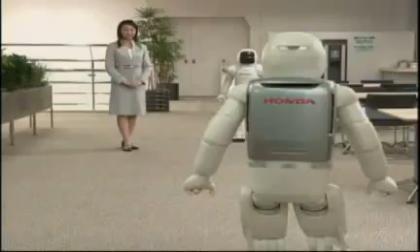This social robot watches another robot which acts as a teacher. Once it can model the teacher, it can try and figure out how it could do this action better than the way the teacher is doing it.

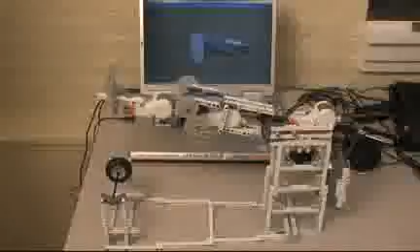But what happens when you have 3 robots or 3 people all learning from one another or working together, collaborating to try and achieve something? Then you get into what's known as the study of social networks.

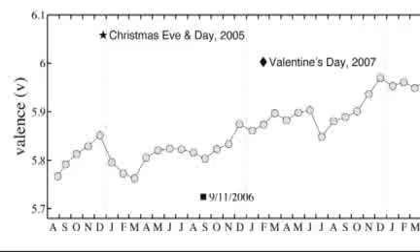There is a transition, I think, in the social sciences where you move away from just having abstract ideas about how society should function, how an economic system should function. Now we can go and look. We just did not have that data before.

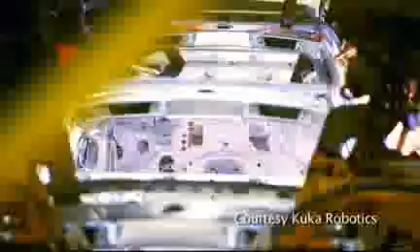There are applications for robots. First of all, we have industrial robots. Most factories in North America and most factories around the world, if you go into one of those factories, there's more robots than there are people. So we know how to build robots that do the same thing over and over again.

But the moment you move outside of a factory to the out of doors or into our homes, nothing is ever the same twice.

Well, there is a very successful robotics company in Boston, iRobot, and they've developed the Roomba, which is a robotic vacuum cleaner. So the floor of your home is relatively simple. The robot simply needs to move around and vacuum the floor. When its bin is full, it knows how to go and empty the bin. It knows how to find a wall socket to recharge itself. So we're moving in that direction. But again, the floor of somebody's home is a relatively simple environment.

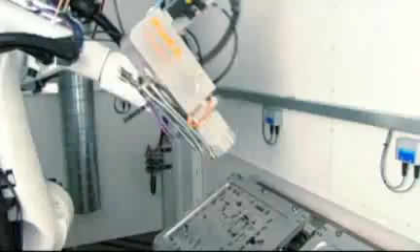Since the advent of computer-automated manufacturing, our society has been influenced by robotics in the workplace. As Josh describes, it's very common to see robots performing repetitive tasks in controlled environments. But why don't we see them more often integrated into our modern society?

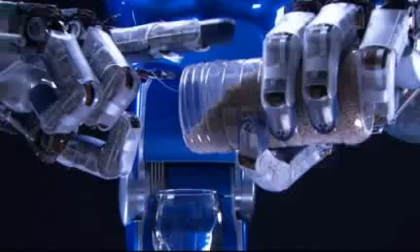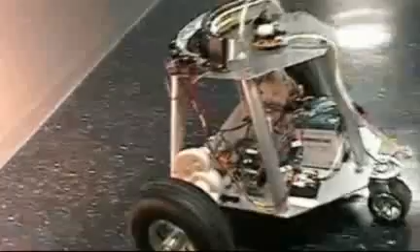There are 2 main issues, I think, about why we don't have robots in our homes or working with us out of doors. The first one is a hardware challenge, has to do with batteries. It's one of the challenges we're facing with hybrid cars. We can't power our robots without a cable to an electrical socket for a long period of time. The other challenge is intellectual, which is that we don't really understand what we mean by intelligence. How is it that we accomplish tasks in the real world?

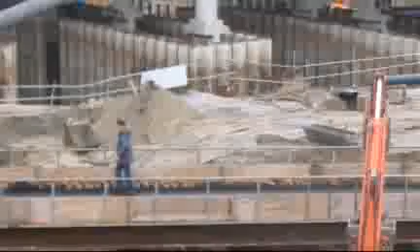So one application that I'm interested in is construction. For example, if the robot is programmed to move a pile of bricks from point A to point B, there might be people near the pile of bricks, so it needs to be very careful. The pile of bricks is never going to be exactly the same from one construction site to another, so how does it know how to deal with bricks of different size?

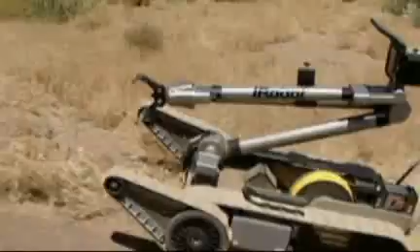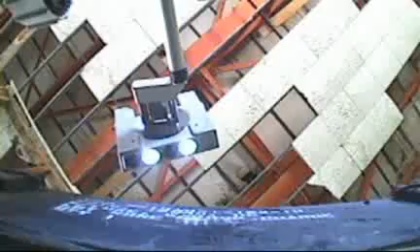What happens if it starts raining? What happens if the site where it needs to move the bricks is on the other side of a road? It needs to know something about cars and safety and so forth. It sounds relatively simple, but you could see how machines like that would start to work alongside humans and allow us to build things on a larger scale, to build them more cheaply, and so forth. So that's my personal goal.

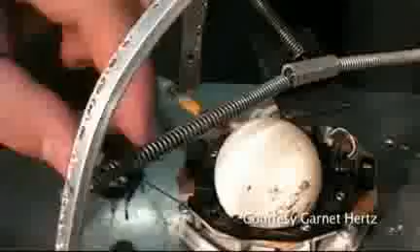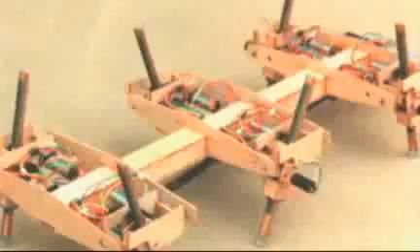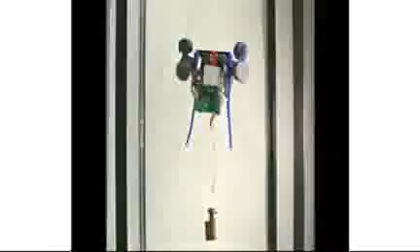A lot of the insight we gain into intelligence comes from insects. Biologists are beginning to know a lot about insects, how they see their world and how they react to it. Insects are quite sophisticated machines, but a lot of their hardware is relatively simple. They have relatively few neurons and synapses, yet they're able to do a lot with that simple machinery. So can we take insights from insects and build that into our robots, so they do simple things like insects do, for example moving towards a light source, moving away from a light source, finding an object of interest, picking it up and moving it somewhere else? Once we master those skills, we can look at more sophisticated organisms, like mammals, and ask what's different between mammalian intelligence and insect intelligence.

The robot I'm going to show you now in the lab is a social robot. This is somewhat different from some of the examples I've given already. Primarily what we're trying to do is study what we call intelligent robots, or adaptive robots. So what we'd like to do is eventually create robots where we tell them what to do, but they figure out on their own how to do it.

One of the ways we do that as humans when we're young is to learn from another, to learn from a teacher. Developmental psychology is about how children learn, how they transition from infants into functioning adults. One of the things we all go through at a very young age is that very quickly we learn how to imitate. But at a certain point we go beyond imitation and we go on to inferring intent. So if I observe a teacher trying to perform an action, for example separating a pen, but they're not holding the pen in the right way, the student can infer that the teacher is failing at the task. When you give that pen to the student, rather than imitate the teacher, they'll grab the pen in a different way, separate the cap from the pen, and give it back to the teacher.

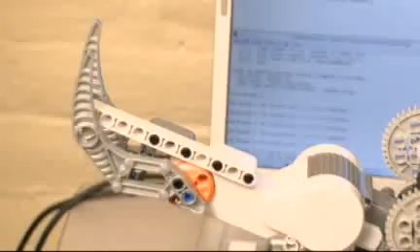One of the projects in my lab has to do with this robot you see here. This is an experiment that's partly finished. Eventually we'll have two of these robots facing one another. One will be the teacher and the other will be the student, and the student will learn from the teacher.

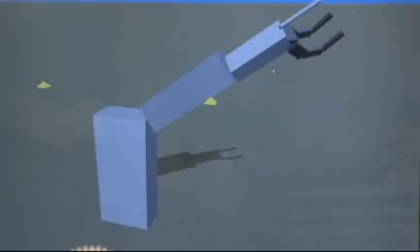That's fascinating, can you show us how it works? Sure, so as you can see, this is our robot here, and this work is in progress. Eventually we'll have two of these robots facing one another, a student robot and a teacher robot. But for the moment, the single robot is going to serve as both the teacher and the student.

First, the teacher is going to demonstrate a particular action. Assume this is the teacher, and there's a second learner robot watching. Our teacher is now performing a very simple action, which is just to lift this object. Now that the learner has seen the teacher do that, it will discover what the game is, which in this case is a game of lifting objects. So the learner has already picked up on something from this social interaction.

Now our teacher is going to perform exactly the same action, but this time try to lift a very different object. This time the teacher fails, and the student sees this and realizes that the teacher is limited in some regard. The teacher always performs the same action, so the learner knows that the game here is to try and lift objects.

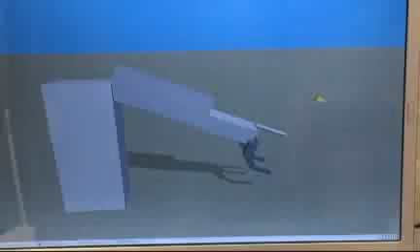In this third phase, if you can see on this back computer, the learner is now thinking—it's doing what we call mental rehearsal. It knows the game is to try and lift objects, and it now needs to discover a new way of moving beyond the way the teacher moved, trying to discover a particular way of moving that will allow it to successfully pick up this new object.

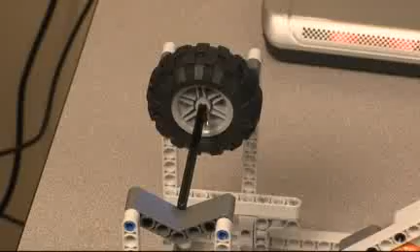They're using a different technique. Absolutely, and it's quite a simple change, but basically our learner has now learned that before it lifts the object, it needs to close its hand, which the teacher never did. So the student here has discovered something beyond what the teacher knows.

And although the actions themselves are simple, what's powerful here is that the learner has demonstrated that it can improve beyond the teacher, and that is a real hallmark of social intelligence, to build on this interaction between learner and teacher and eventually go beyond what the teacher is capable of.

Josh, you're a computer scientist with a background in mechanical engineering and mathematics, and yet your experiments seem to be probing into some philosophical realms, like what is human intelligence? How do you confront that philosophically as well as from a more natural science perspective?

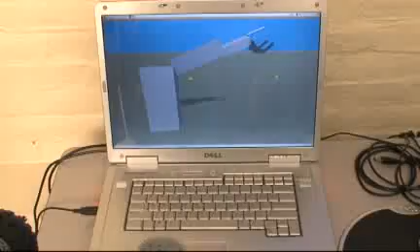That's right. So for us, obviously, we're very firmly entrenched in mechanical engineering and computer science, but it does start to suggest to neurophysiologists, psychologists, and even to some degree philosophers, what does this say about the human condition? Do we actually perform mental simulation like our robots are? And does it say something about the nature of self-awareness? This robot has an understanding of itself and mentally rehearses what would happen if I did this.

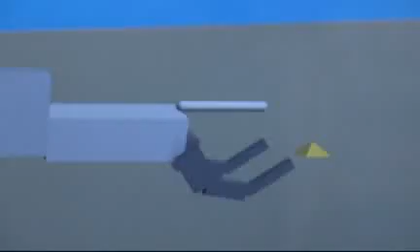What would happen if you have 3 robots or 3 people, or dozens or hundreds? How would they self-organize? How would they learn from one another to achieve a complex task that's beyond any one robot or beyond any one person? And then you get into what's known as the study of social networks. How do people influence one another? How do people learn from one another? And by building robots that learn from one another, that's one approach to investigating social networks.

Certainly, Josh and his colleagues are taking technology and robotics far beyond the reaches of traditional computer science and mathematics, to human development, social science, and even to philosophy.

Next, we turn to how the social sciences are affected by technological advancement, from understanding behavior patterns of individuals, groups, and to entire societies.

If you understand how individuals behave, that's great. You also then need to understand how they're going to behave in a group. I think that the internet is our playground for developing these experiments, where we understand how individuals behave and then how their behavior changes as a result of interaction with other people.

Some of the things that we've looked at in particular are blogs. So here are people keeping an online diary of what they're thinking about as they go through the day, at a vast scale around the world at any given time, and it's all available for us to download. And some of our work in particular then is looking at emotions, how emotions spread, the contagion of emotion, if you like.

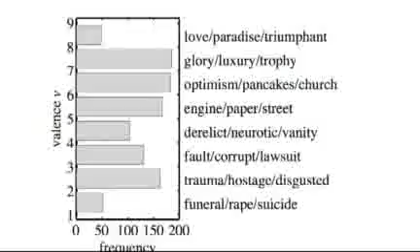So the way we do that is we take a psychology study that was done at the University of Florida, where intro psych students were asked to rate on a scale of 1 to 9 how happy they feel when they read particular words. So the word 'triumphant,' for example, was deemed to be a very positive word, one that made people feel good. So every time we see one of those words in one of these blog sentences over the last few years, we assign that average score from the psych students to that sentence.

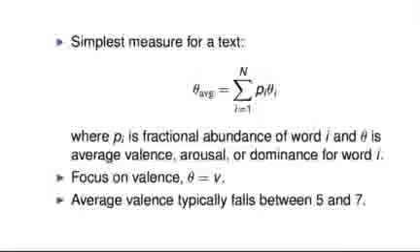And in that way, we're able to kind of quantify the emotion being expressed. This is really getting at a fundamental problem for measuring how well society is doing. But how do you measure that?